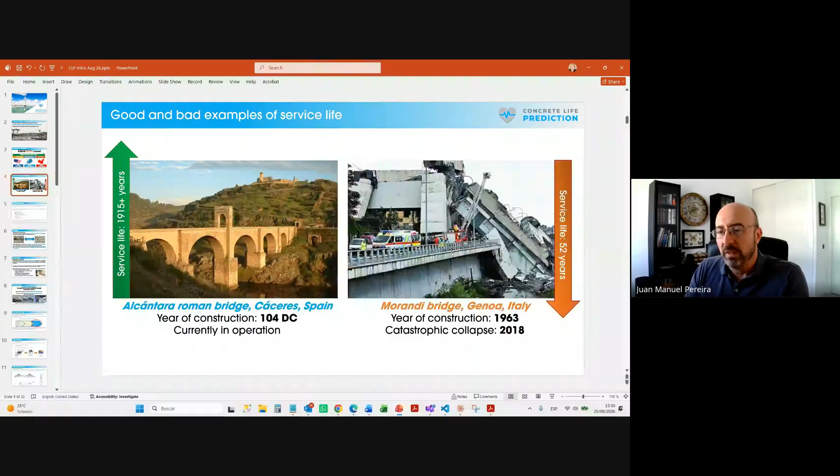So, good and bad examples of service life. This is a Roman bridge. Of course, this has no reinforcement, so that's an advantage towards durability, but this is something that's well designed, even without reinforcement. This is almost 2,000 years old, and cars go through it daily. And this is the bridge we've seen before that lasted 50 years, basically. So as I said, the international standards are moving towards this goal of durability.

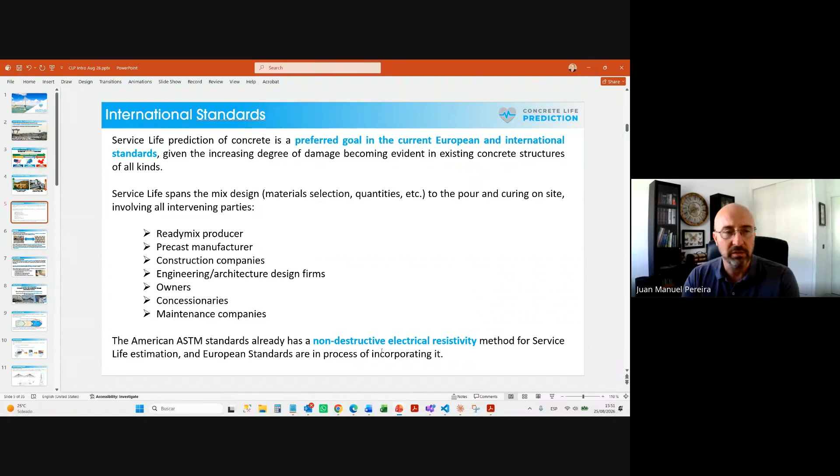Okay, detaching the strength from the durability, because we all know that there is a relationship, but it is not a constant relationship through all the mix designs and through all the different binders. So the initial reference for this was the ASTM standards for non-destructive electrical resistivity testing. Now there's, of course, a European standard on that, and this is what we base our system on: the non-destructive test, which is electrical resistivity.

And the important thing is that we do monitoring, because monitoring is much more representative than cubes or cylinders or samples that you can take on site. Then you cure in the lab, so they are cured in lab conditions. It's not real site conditions. There's also the chain of custody: how the concrete was sampled, how it was cured, how it was transported, tested, etc. So we consider that monitoring is much more representative of the real concrete in the real structure, in the real conditions. Again, this know your concrete concept.

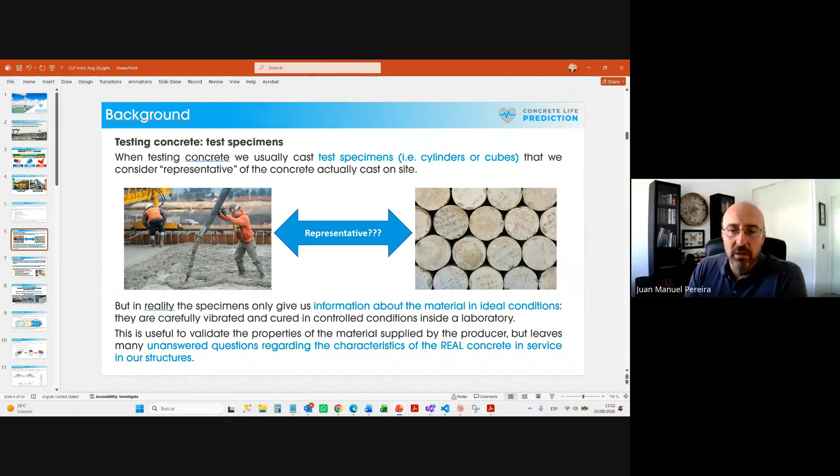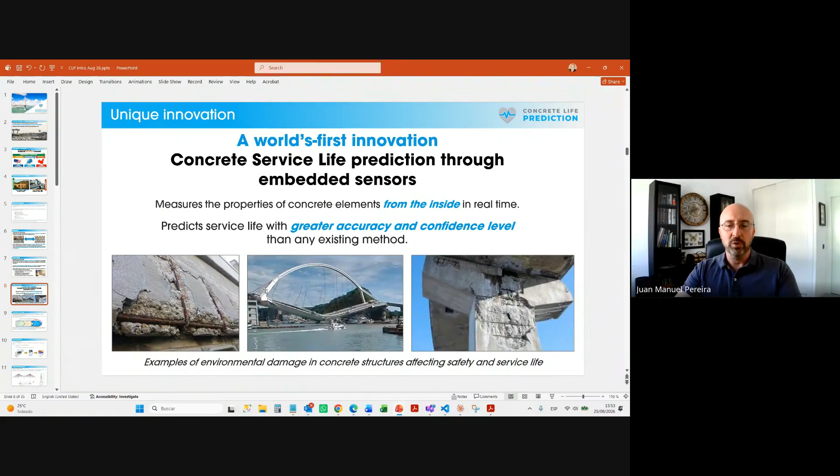So basically what this slide says here: what we built is a patented innovation, the world's first, which is service life prediction with these embedded sensors for electrical resistivity. We did not invent the sensor. We took existing technology and proven designs of these sensors, and we made it into this comprehensive system to predict the service life. Not only measure, but also do this prediction. And this is a key thing to guarantee 100, 150 years of service life. That is what most new designs are talking about.

So within this whole ecosystem of SHM technologies, structural health monitoring technologies, there are environmental ones, of course. You have like a weather station that you put on your structure, usually a bridge, so you measure temperature, moisture, wind, etc. There are a lot of physical sensors. I take the example of bridges; it's not only for that, but it's a very good example for vibrations, displacement, strain, different load sensors, etc. And there are also technologies that measure the corrosion potential, but they are measuring the steel. Ours is for the concrete.

What we correlate to with this non-destructive electrical resistivity method is the porosity of the concrete. Porosity has an impact on everything because it shows you how the concrete is evolving. So it relates to strength, to chloride permeability or carbonation, also the maturity of concrete. And it can also be related to damages that happen later, for instance alkali silica reactivity, which starts with micro cracking the concrete from the inside, and also delayed ettringite formation, DEF. Any of these expansive damages increase the porosity because they form micro cracks. So we can detect both how the concrete improves over time and if these things happen. And it's a non-destructive test, so we can measure this continuously. That's why it's a monitoring system.

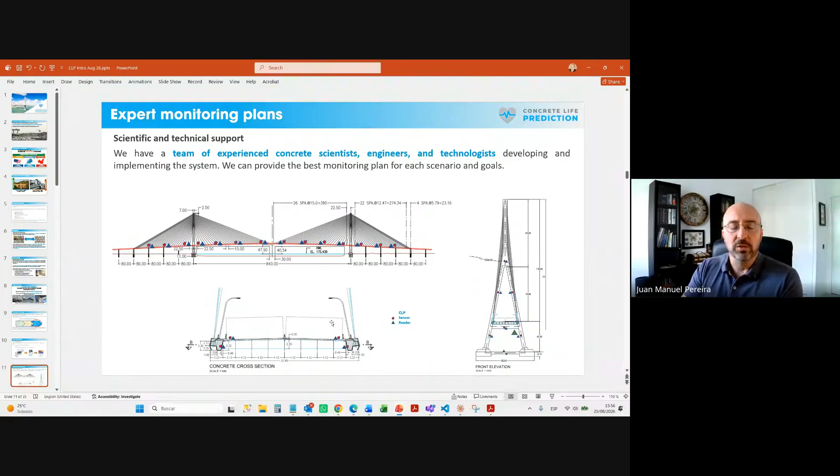Of course, this goes with the monitoring plan. We help with that. We're not a sensor factory. This comes with consulting involved, because where you put your sensors, what is the most optimal position, how many you need to optimize the number of sensors, what you are looking for in that position. So there is some engineering involved, and then there's support for that.

So we have a comprehensive solution where we have the sensors, the data logger, the transmitter, the special software, and the consulting support with some public and some proprietary service life prediction methods, and I will show you in a moment. So this applies to basically everything, both producers of concrete, which can be in the design stage with laboratories, characterization of mixes at ready-mix or precast factories.

And then the users: public works is the most prominent, of course, with more critical structures, more budget for monitoring, or even including the monitoring plans and these monitoring technologies into the projects. So they are mandatory, and this is coming from the owners or the designers of the project, because they need to guarantee that durability, that service life. But also in other types of construction, residential, logistic, industrial. So this is applicable to any concrete structure.

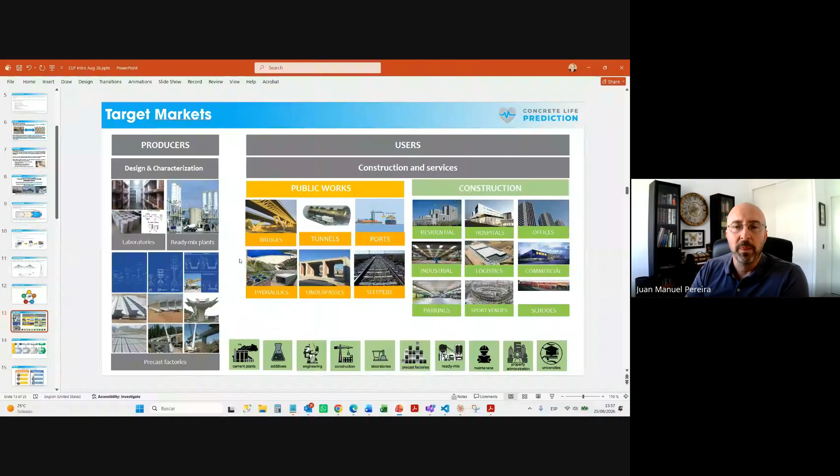This starts at the project stage, where there are some durability specifications. So the engineers and engineering firms, they have these durability requirements. They specify what type of monitoring needs to be done, and also the mix designs, how long the service life needs to be. So in the design stage, there is the material selection, which materials we can use, which perform better. This system gives much better information about that.

And that's an advantage because this is not a lab test. This is something that you can use in a lab to simplify and streamline your processes, because instead of curing a sample and then taking it out and conditioning it and then testing it with the lab equipment, that usually takes at least a day. I'm thinking chlorides like the RCP. It's like one test per day per unit you have. This is continuous monitoring. So once you have your test specimens, just let it sit there and you get data every day. So that helps with the material selection and design of the mixes.

And it's the same system that you can apply at the construction stage. So the same readings you get in the lab or the design is what you get in the construction. So this is really important to check the quality of the construction process, because we can design the best mix, but then what happens during transport? What happens during the pour? What happens in curing? Anything that we do poorly will degrade the quality of that concrete. So we design for one quality and one service life, but then we get something different. With this system, you can measure the same that you design in the construction.

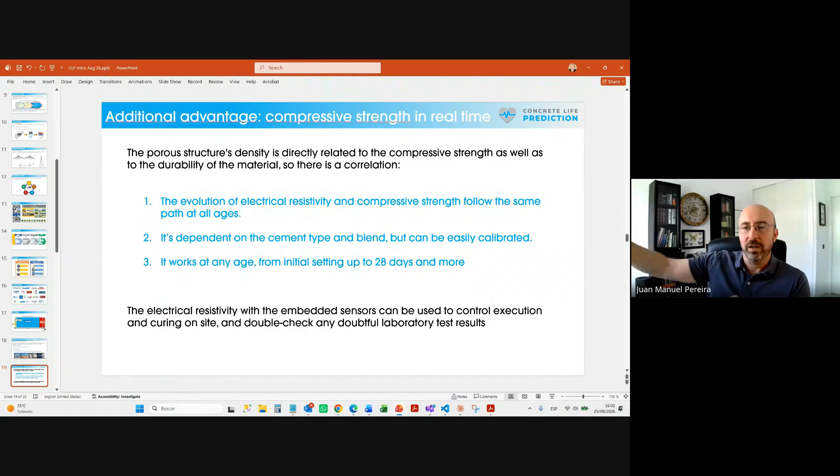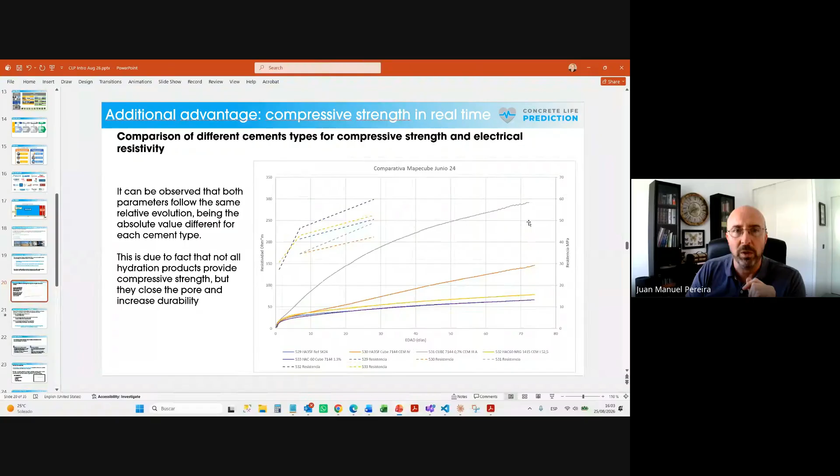Regarding sustainability, we all know this KPI, which is the amount of CO2, maybe kilograms, maybe tons of CO2 per cubic meter, or per ton of concrete, depending on what unit you use. And we make a case that this is not a good indicator, because, and this is a very simplified example with raw numbers but realistic, you can have two concrete mixes with different cement types, and one has a lower CO2 footprint per cubic meter than the other.

So if you need to make a decision about which concrete is more sustainable, of course, everybody will go for the lowest one. But what we do is we combine it with the service life prediction. Service life prediction is years until the corrosion starts, so it gives you a time span in years, which is very easy to assess, towards the durability and how many years that structure will be in service. So if the lowest CO2 has 20 years of service life and the one with a little bit more has 30 years, we have a much better indicator, which is the yearly CO2 footprint of each concrete.

Because we can only think right about sustainability if we think long-term. And I know that sometimes the requirements are simplistic, so they ask for the current CO2 footprint. They don't take these things into account because they were very difficult to measure. And as usual, the technology goes ahead of the legal part, or the standards. So this is something that as technicians we push for, because a better assessment of how sustainable the concrete is benefits all of us and future generations everywhere. So this adds this per year, a much better indicator in a very, very simple manner.

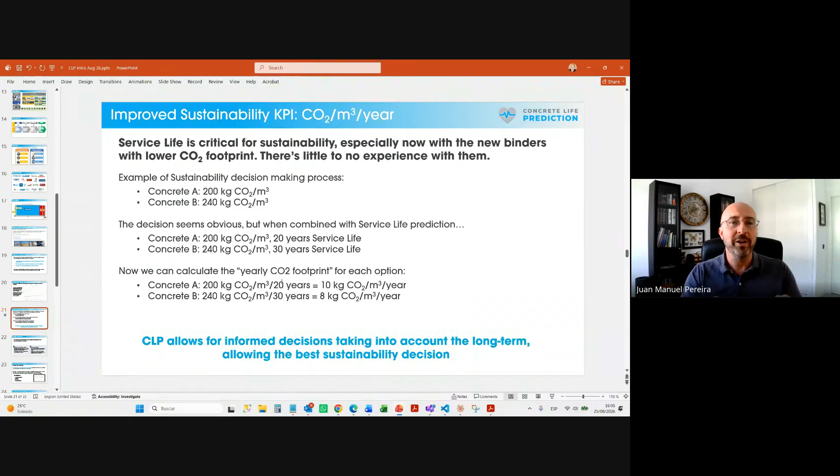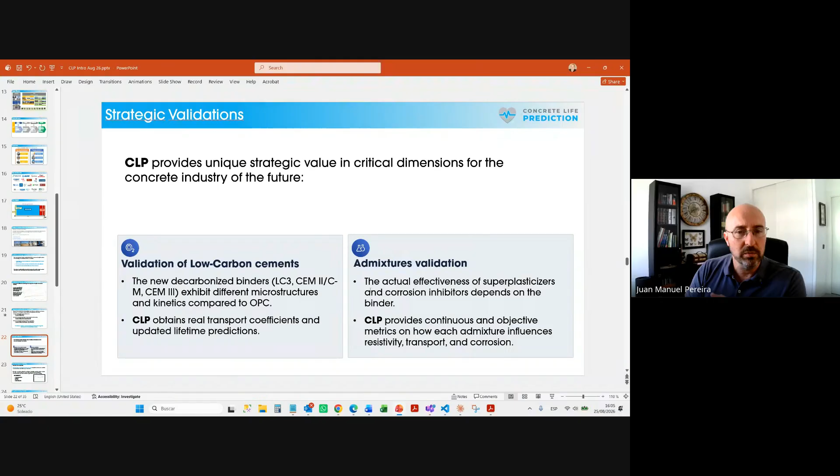I will skip a little bit ahead of this part because I want to show you the references, but this can be used strategically for new types of blends, to validate the admixtures that, for instance, extend the service life or reduce the porosity. It is an actual way of measuring and proving that this works. So this is interesting for many different players. It's a practical and effective solution.

Just a recap: we make the service life prediction, we can measure chloride permeability, we also have carbonation models. We get weather information automatically. The sensors connect automatically to a gateway or a router, so you don't need to go and download anything from the sensor; it's all sent to the cloud automatically. And this links to our concrete quality software, where you get all the traceability of the materials used, all the trials and design, all the quality certificates, all the tests during construction. And we can even connect to the plant and get all the loads. So you have a comprehensive set of information.

And this is not minor, because I've talked to many people around the world, and when there is a problem and you need to investigate, it's very hard to put all the information together. You can have the batch information in a batching system that maybe the plant is no longer using. Maybe you have some Excel files for the tests, some PDF here, something there. So putting all of that together is really complicated, and sometimes parts are missing. In this case, we put everything in one platform, in one format. Everything is perfectly traceable. So this adds a lot of value, and it's a very handy tool for the producers and the designers.

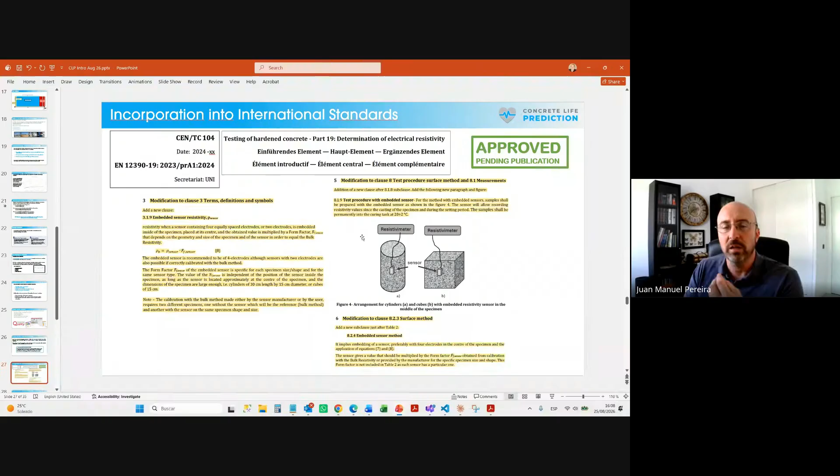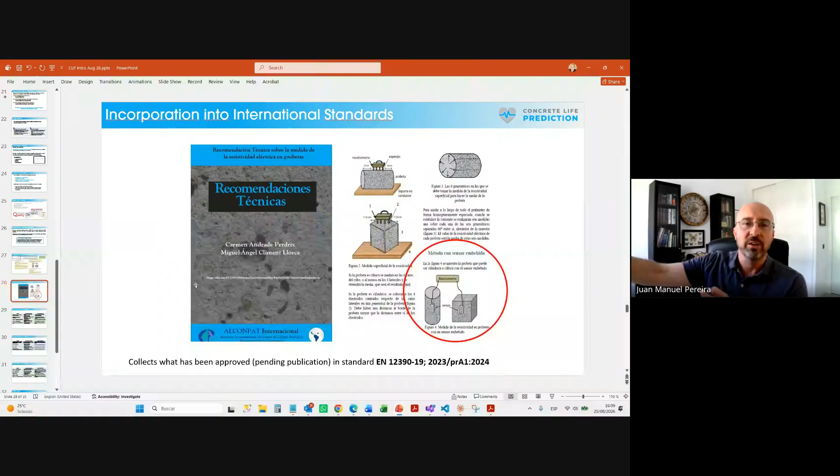real projects. These are also some technical recommendations in ALCONPAT, the Latin American Laboratories Association. They don't have a Latin American standard, but they have these guidelines, and this is incorporated as well. And I'm going to speak about the Fédération Internationale du Béton, the International Federation of Concrete, FIB, because we use these methods, their models for prediction of durability, and how this relates to the standards. I'm going to skip ahead because this is quite dense.

Of course, this is patented. We had the patent granted a few years ago. We had a European Seal of Excellence with this project in 2020, so we had some funding to develop this project from the European Commission. And we got this through the Madrid community in Spain in 2023. So this is a very quick overview of the system. I'm going to jump to a few references, and then I want to show you the software working with one real case that we've been monitoring for almost 3 years. And then we're going to go to the questions part.

So some references, so you see different applications. This is the unit. This is something you can hold in your hand. Like I said, the sensor is quite small in footprint. We can design them differently for larger aggregate sizes; these electrodes are separated more. This is 15 millimeters, and this is a temperature sensor. So we measure the electrical resistivity and the temperature, which are very closely correlated, because the more the temperature rises, the lower the resistivity is, because the ions can move more freely. So we measure both.

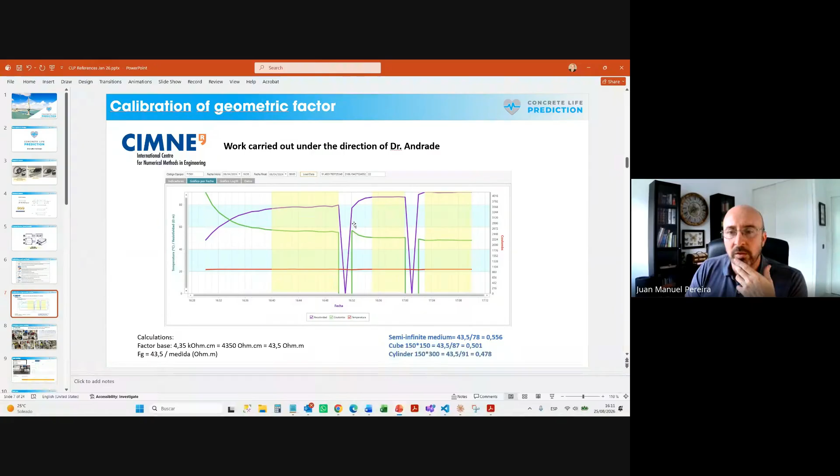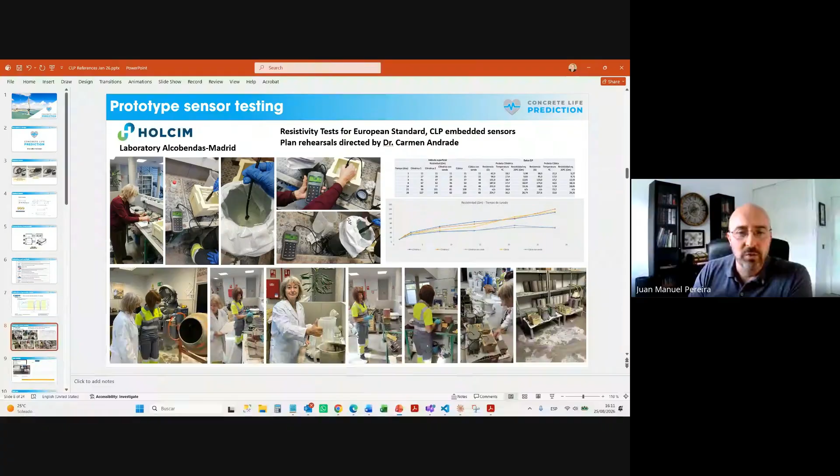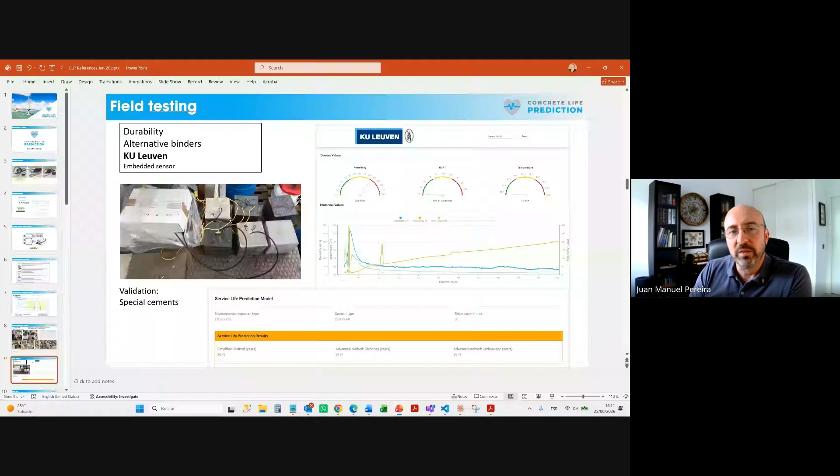Again, some people that we work with; these are some initial calibrations. Some of you may be acquainted with Dr. Carmen Andrade. She was a scientific advisor for the development of all of this. So this is her, and we were working with Holcim, and these were the tests we ran for the European standardization, the standard I showed you before. This is with new types of cement. You see this black test specimen. This is not coloring; this is a high ferrous binder. So we're comparing the OPC with this binder and how it performs, and this is in Belgium.

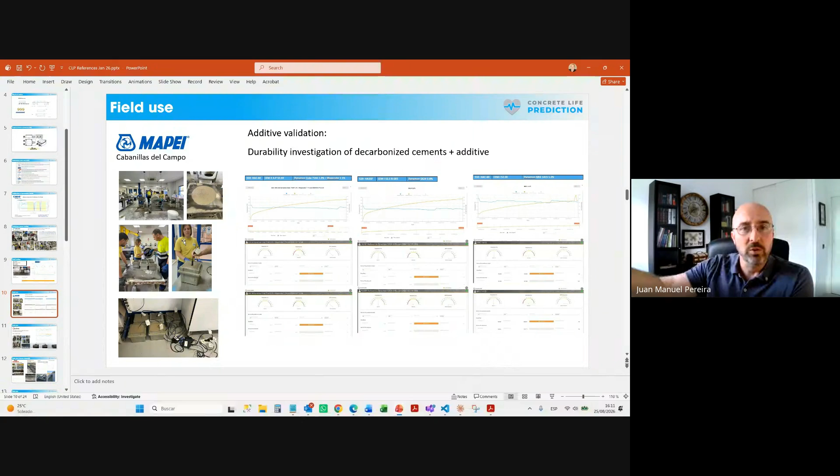This is MAPEI in Spain, with admixtures, application of different types of admixtures to increase the durability of concrete, or reduce the carbon footprint of concrete, and how that relates to durability. Acciona is a construction company in Spain. We made this project in the port in the north of Spain, in a city called Gijón. And this is the one I'm going to show you. We cast different types of concrete with different exposures.

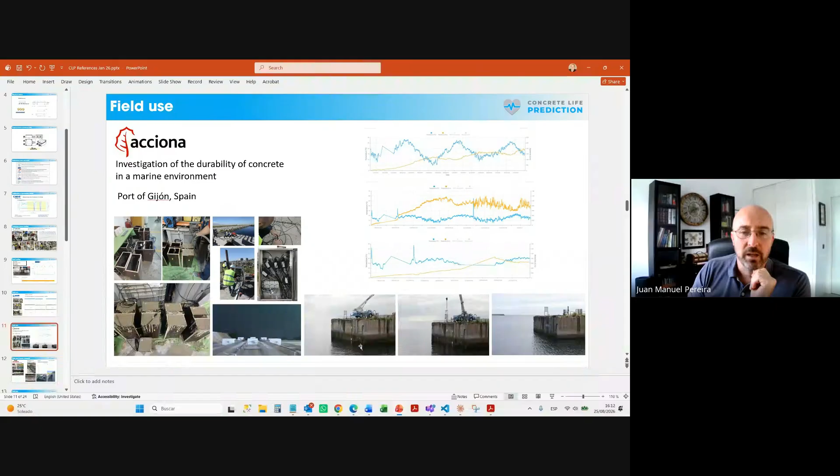In this case, I'm going to enlarge this one so you can see it better. So it's these elements, all painted with epoxy on all faces except the one exposed to the environment, simulating a real element exposed like this pier here. One remains in the splash zone, one in the tidal zone, one remains permanently submerged, and there is another one 100 meters from the coast. This is a two-stage project.

We did 3 types of concrete on the stage 1, another 3, so it's 6 of these in total, okay? And this is the one I'm going to show you in the software. So this is a very interesting project because we tested many different types of concrete. The durable ones, the ones we knew they were not durable, ultra high performance concrete, very comprehensive. And this is a Spanish company with international reach. This is precast. This is the largest precast manufacturer in Spain.

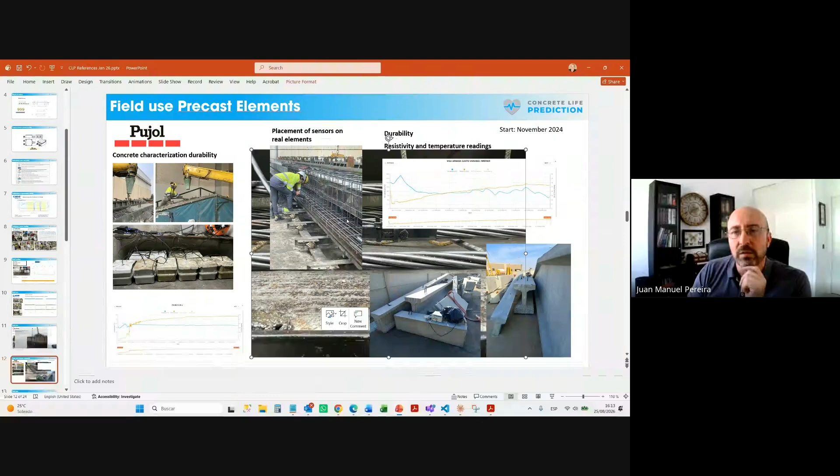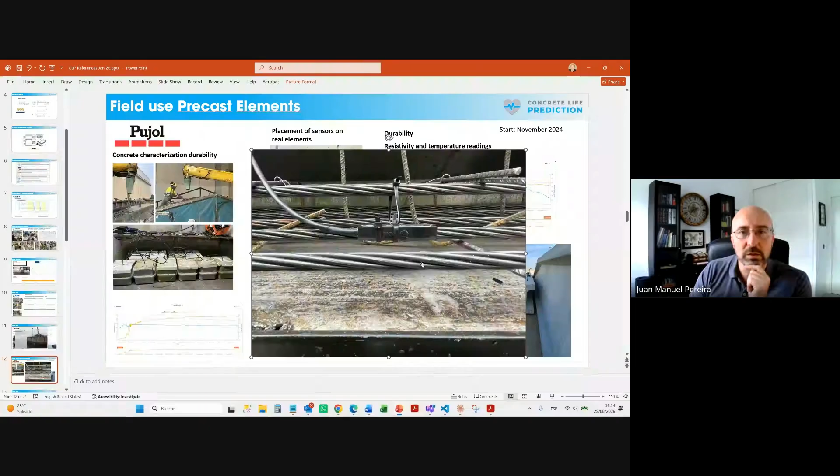You see here how we tie the sensor. Sorry, let me pull this up. Okay, so how we tie the sensor to, in this case, it's not a rebar, it's a pre-stressed tendon. Because this is the most critical part for durability. So we measure the cover here, and we see how the chlorides or carbonation ingresses to depassivate this element, which is critical because this is pre-stressed. So this can be applied also in the factories. This is with Saint-Gobain, again with admixtures, a different set of admixtures.

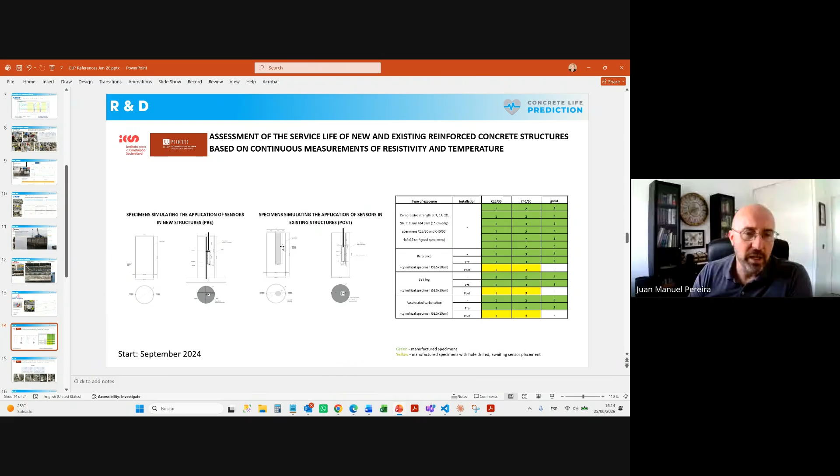This is all that we work with the University of Porto in Portugal for this procedure to introduce the sensors and how to assess an existing structure, what is the procedure to put the sensors inside and make measurements and predictions of service life of existing structures. This was a project with the University of Porto, part of that big European funded project. So we have a whole analysis on this and some AI models as well. A lot of lab tests for carbonation, for chlorides, etc. Then some real structures.

This in Porto, you see the cruise ship there. This is a test structure we have close to seawater, so this ambient for sea mist, and how it works. And you can really tell when the moisture goes up, when it's raining, it's not raining, how it impacts the mobility of these chloride ions inside the concrete.

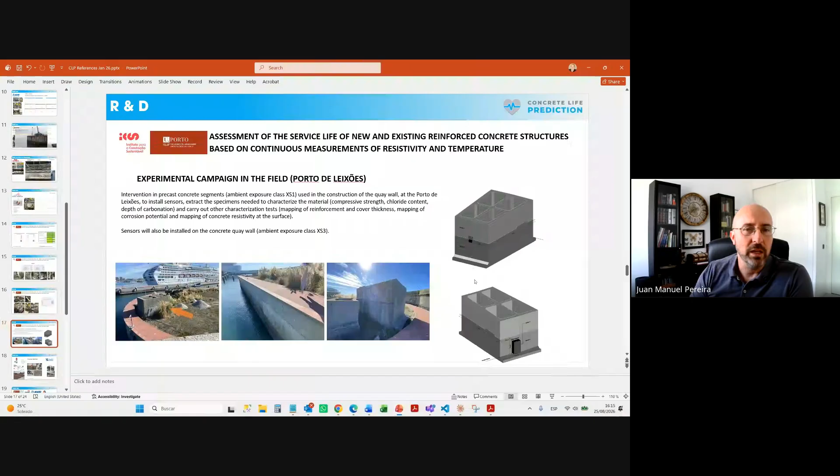This is a nice project, again, with the Port Authority in Bilbao, a different city. And this is with recycled aggregates. We did a 400 square meter test for a slab in the port with different types of replacement of recycled aggregates. So one panel is normal concrete, another one is a 20% replacement of the coarse aggregate with recycled aggregates, and the other two had a higher proportion of recycled aggregates, even going to 100% of the coarse and 25% of the sand with recycled sand, which is a very big step up towards reducing the carbon footprint. Also with new binders, with high replacement of the clinker with supplementary cementitious materials.

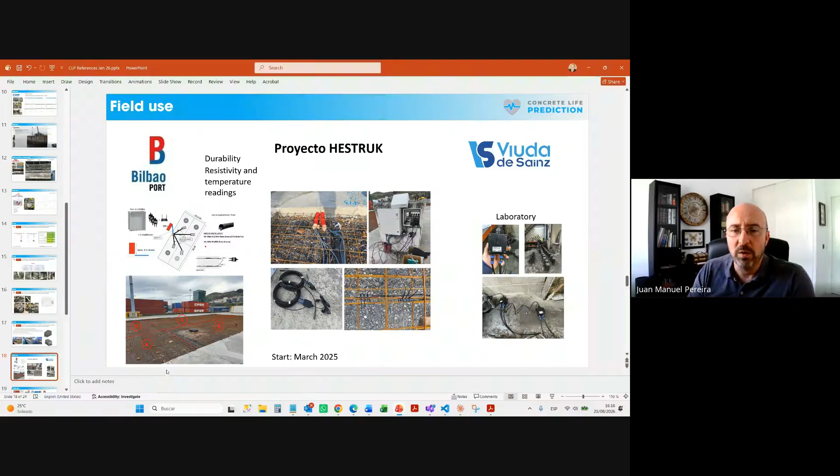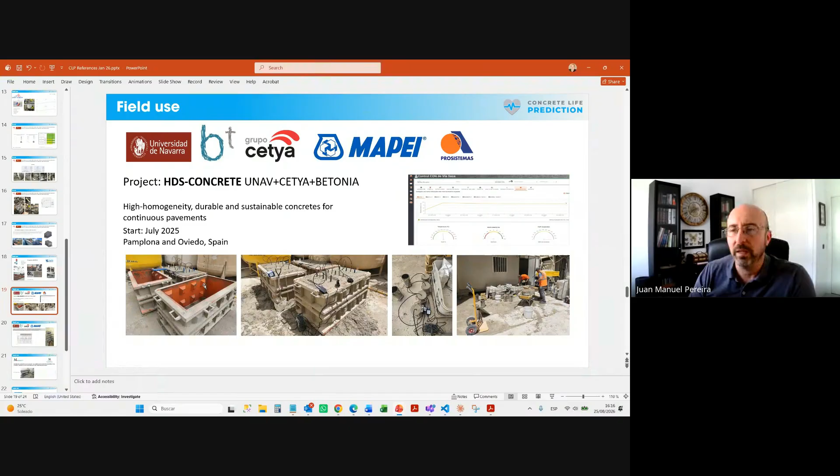And the port is really interested in these things because when they demolish a structure, they need to know if they can recycle it or not and how that affects that. And especially in ports, having 100% uptime is really important. And these are other types of investigation with universities in Spain and different companies, experts in slabs, for instance, and polished floors, like an Amazon warehouse, for logistics. So we did a lot of tests with this.

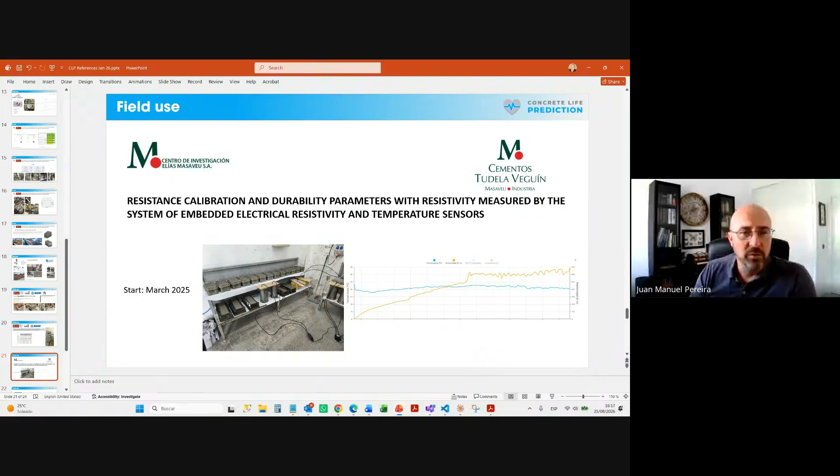This is with the cement manufacturer for exposure to seawater, different experiences as well. A very big set, this is just a tiny bit. We cast over 100 test specimens with different types of blends of cement. Also in Australia, we have some references, some other references worldwide. This is an admixture supplier. This is a consultant in the Middle East. This is a consultancy also in the UK.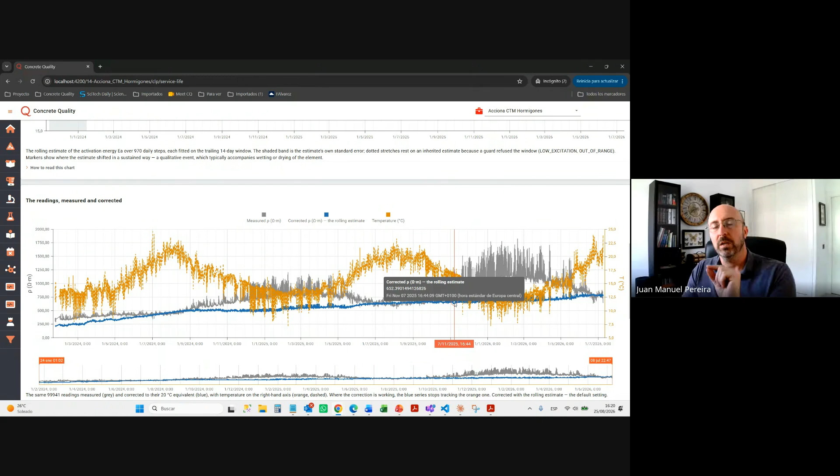So basically what we get is that this in yellow is the temperature. You see in gray the readings, uncorrected. And what we get with this correction is this blue series, which you see is like linearly improving. And this is important because this allows us to correlate a reading we have in a real structure to what we would be reading in a laboratory environment, because we correct this as if it was 20 degrees as in a laboratory.

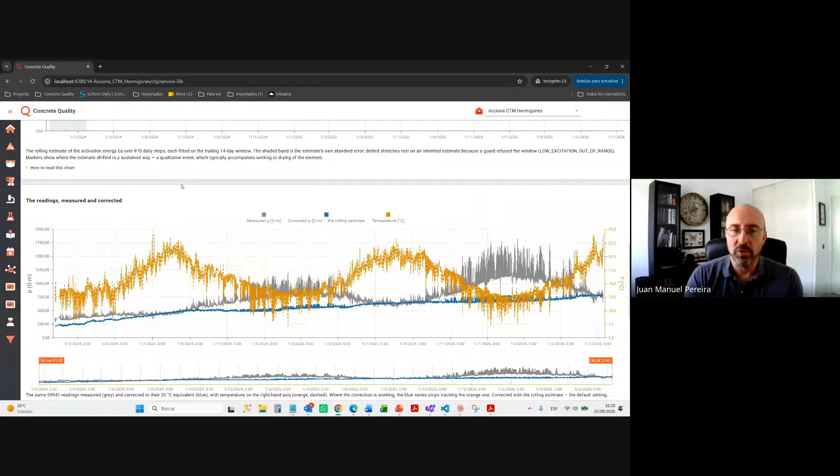So this will allow us later, I will tell you in a moment, to use any type of test that you do in the lab, whether RCPT, chloride diffusion test, whether normal or accelerated, etc., to correlate that to what we measure with the resistivity. But let me go to that part. Then we have the aging factor. The aging factor is one of the critical parameters that all of the durability models use to predict how the concrete will evolve over time. This is usually tabulated.

So it's known that for different cement types, for instance, for this cement type, the typical value is 0.6, ranging from 0.5 to 0.7. We actually measure this in our concrete in this exposure, and it's almost 0.7. And this is an exponent. I will show you the equations later. So this small change from 0.6 to almost 0.7 has a huge impact on the prediction. So you see that there is a very good fit, and we're showing it here as a logarithmic axis.

So these blue are the readings, corrected for that temperature as we did in the previous step, and this is the aging law. So the slope of this curve is that aging coefficient. It tells you how much the concrete will improve over time. When we have the readings, we use the readings. When we don't have the readings yet, because we are predicting for 100 years, we use this, and this is fitted to the real concrete in the real structure, not something tabulated. So it gives you a much more precise prediction. And this is a key point in doing this monitoring.

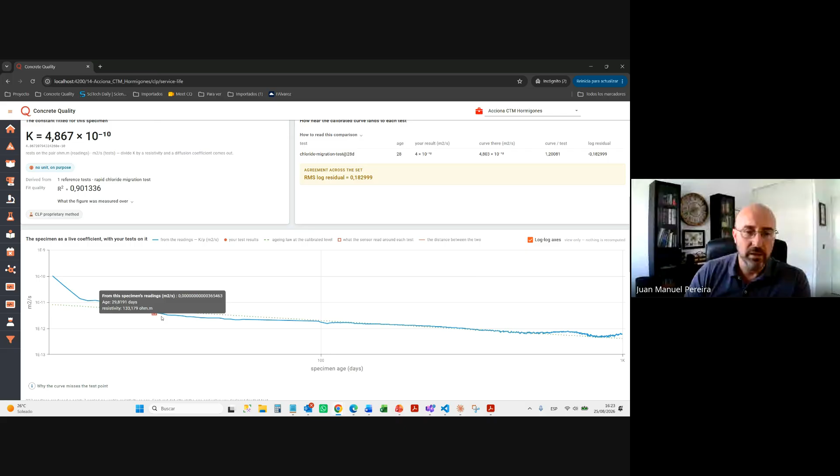Okay, so any test, even with one test that you have, everything else works. Okay, so we have these basic models. These basic models are the models from Dr. Carmen Andrade's investigation back in the 90s, when she basically put all the theory together for the RCP test. That's the basis of the RCP test, her theory.

So we have these two models. There is a very basic model, a simplified model with no aging, meaning that we don't count this aging factor. And this is based on the 28 days result. So if the concrete stopped at this moment and you expose it like that, how many years will it last? That marks the bare minimum of the service life. So in this case, it's 50 years. This is a 100-year concrete. So the bare minimum at 28 days is 50 years in this case. So this is a very good concrete.

With the advanced model that takes into account this measured aging factor, and we put it here, you can put the manual entry or the tabulated one, we calculate that it's almost 300 years. Okay, so this is shown here. This is one that's stable with no evolution. This is the prediction, the brown one, and this is the actual readings. So we see that it fits quite well.

Okay, then we have the fib model. The fib model is this one I have here in this presentation. I'm not going to go too deep into the equations, but it's worth showing you what the equation is like. So this is the model, and this is probably the most well-recognized model in the world we have for chloride ingress. So this is an initiation model.

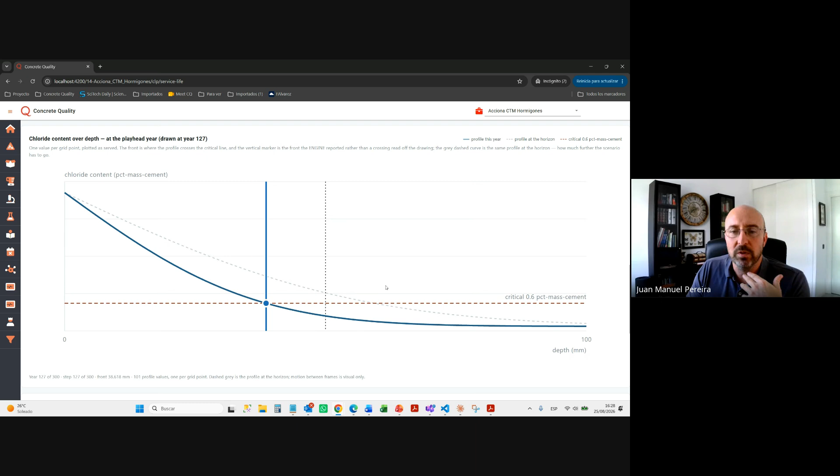Okay, so this is the fib model, and then we have our own proprietary models. In our proprietary models, what we do is basically take all these equations from fib or from these basic models, and we put the real data in. And that changes the prediction.

I think that this is the best one, because it gives you a much more realistic service life prediction. It's also based on real data, and this prediction will keep improving over time as we get more and more readings, because as more time passes, all the coefficients are more accurate.

And then making sense of all of this. Again, this is also moving, so you have these thresholds, etc. So this is very complex. It has a lot of different things and different concepts to convey. So we added an AI analysis. This is an AI trained with all this information and knowing all this theory, so it helps you analyze all of these results.

So in summary, we have these different methods that give you different service life expectancies. The AI understands which one is better, which one is worse in which situation. It can compare all of them. It can give you recommendations and predictions. For instance, this is saying this is a good concrete because this coefficient is quite high. This activation energy is outside the normalized standard, so you need to keep working on it, keep measuring it.

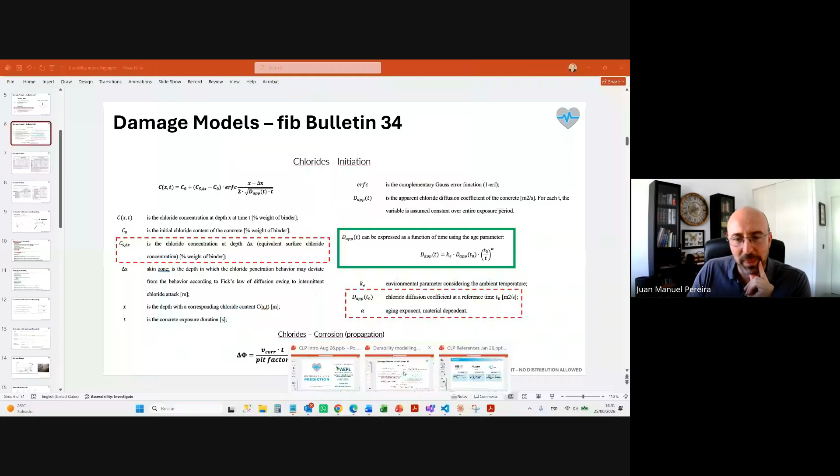laboratory tests. So you make your mix design, and you cure it for 28 days, 90 days, 180, depending on what your plan is. Usually these chloride migration or carbonation rates are accelerated tests that work well at 90 days. And non-accelerated tests that are a bit more trustworthy, you need to wait for 180, 360 or so, half a year, 1 year, even 2 years.

So doing this type of tests is okay for design, but a 2-year-long test is not at all okay for control of the site. You cannot take a sample and see how this works in 2 years, because in 2 years maybe the building is finished. So our approach here is to take the resistivity sensors, these are our sensors,

and when you do any testing plan, you just cast 2 additional ones for each concrete. So you have test specimens for strength, for chloride migration, for carbonation, whatever. You cast 2 more, and these give you continuous measurements, so you can keep reading up to any age. And these readings will correlate to the strength, to the chloride migration, to the carbonation, to anything you measure, just by adding 2 additional test specimens and leaving them in a corner, in a tank, reading. You don't need to interact with them. It's just continuous.